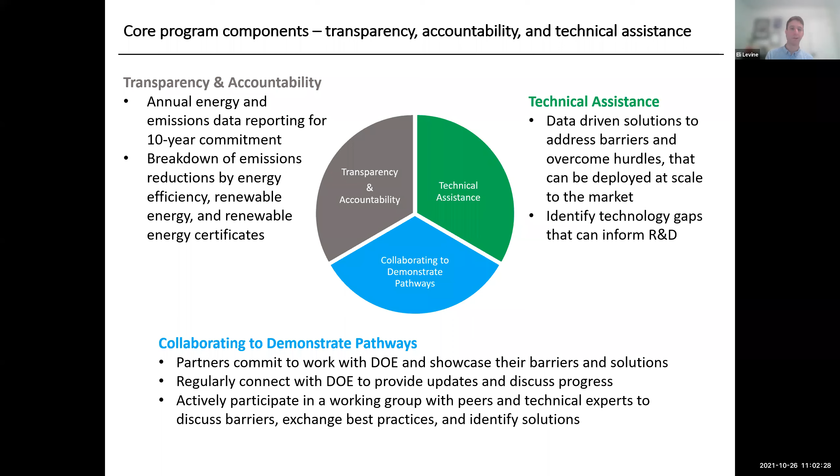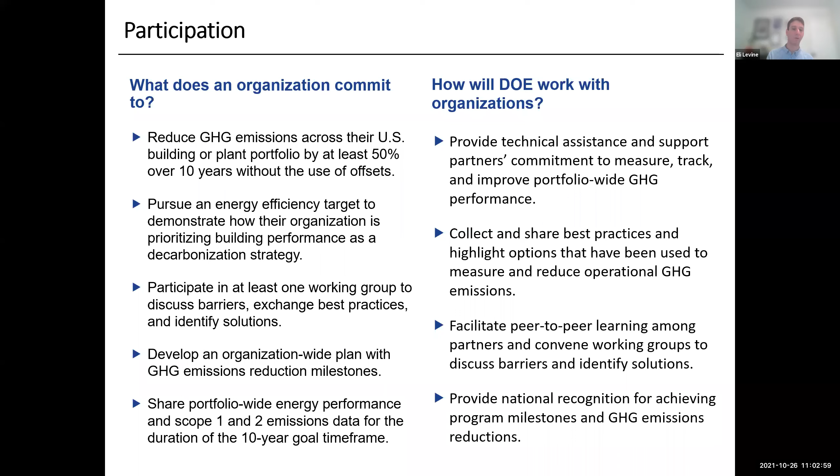So what do we ask? We want you to commit to reducing your carbon emissions, to continue to pursue energy efficiency, to participate in our working groups so you can learn from each other and get the most out of the program, and to continue sharing your data with us. In return, we will provide robust technical assistance, tools, training, and resources, as well as facilitating peer-to-peer learning and providing national recognition.

So, next slide. If you're interested in any of this, and I really hope you will be, there are ample reasons to be. Not only is it good for your organization in the future, but there are all of these other resources as well. There's no cost to participate, and we hope that you'll do so. If you have any questions, please reach out to me, the Better Plants team, or the broader DOE team. Thank you for considering this. Happy to answer any questions you might have, later, offline, or whenever.

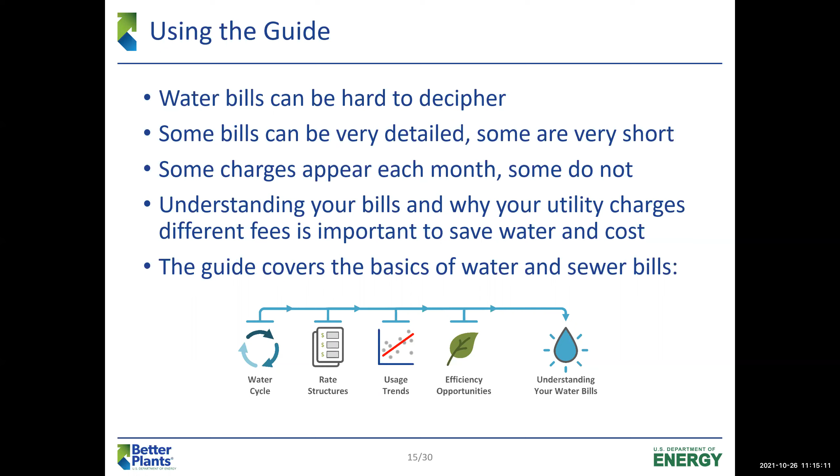I want to clarify that this document we've put together for our webinar today is for utility bill water, meaning water you receive a utility bill for from a municipality or a private water company. This does not include source water that a lot of manufacturers use. If you are self-sourcing, that is not covered under the scope of this document. Rather, we're talking about a physical bill that you receive from your municipality or a private company.

So to start, where is your water coming from? How is it produced? Water is a bit different than the other utilities we have looked at in this series. Natural gas and electricity are produced and distributed, then used, and at the end that's basically the end of the utility line. The energy is transferred into the product or moved somewhere else, and that's the end of that utility.

For water, it's more of a cyclical path. It'll keep repeating itself over and over. So once that water is used and discharged, it will rejoin the cycle and be treated and reused over and over again.

This is referred to as the urban water cycle. This is a bit different than what we learned about in elementary school. Rather, this is the urban water cycle, showing where your water is going in the system and what all the different stops are. You'll see that we start at the top of the cycle.

We start with your source water. That source water can be rivers, lakes, ponds - wherever that water is initially coming from. That water is pulled into a water treatment facility from those local sources like groundwater or rivers. Water treatment facilities physically and chemically treat that water to balance it and bring it to a potable level that you can consume, by removing those harmful substances and pathogens that may occur in the natural source water.

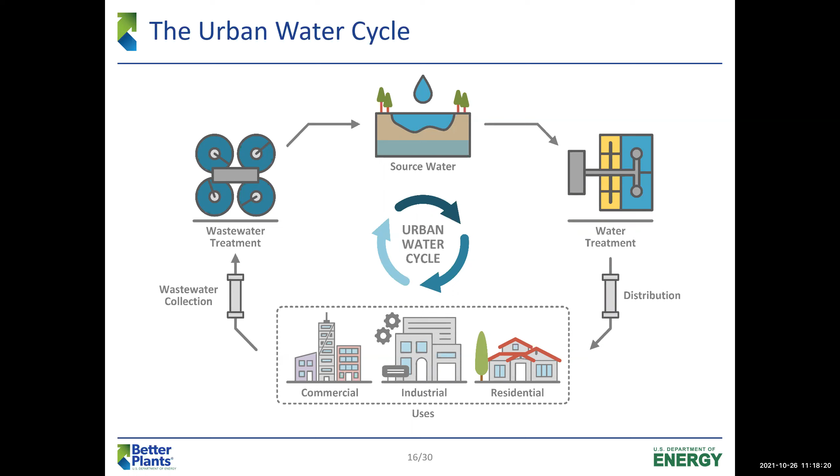So your cycle may be a bit different. You might get water, some may be sourced groundwater by yourself, and you only get a certain percentage of municipal water. Maybe you collect rainwater, or have a lake nearby that you're able to use or that you own. You might not have the same distribution system, and may have industrial water sources instead of regular municipal water sources. But overall, this is the same cyclical path that water will pass through over and over again.

So we talked about the source water a little bit. Let's talk about the treatment process. You'll see there are 4 main methods listed. We like to clump together coagulation and flocculation. That method is more commonly seen in water treatment rather than wastewater treatment, but it's still there.

The way that works is positively charged chemicals are added to the incoming water and debris, which neutralizes the negatively charged particles in the dirt, causing them to bind together, forming clumps called floc. You'll see in that flocculation image that dirt is being clumped together and building these flocs. Due to that increased weight, the floc will then settle to the bottom, forming sedimentation, which separates that floc and the water.

That layer of sedimentation then goes through a filtration system. So once that floc is settled, the remaining clear water is routed through a filtration system.

Several filtration systems are used in the industry, and they vary in composition and pore size. So the bigger the pore, the more that will reach through. The smaller the pore, the more it'll catch, right? Just a normal filtration that you think about.

Common filtration systems include activated carbon, maybe reverse osmosis membrane, or a mixed media. So maybe you have sand, gravel, and charcoal, or I've actually seen personally several combinations, right? I've seen membranes be used and then they'll go use the filtration, or vice versa. So you can have a variety of different filtration processes.

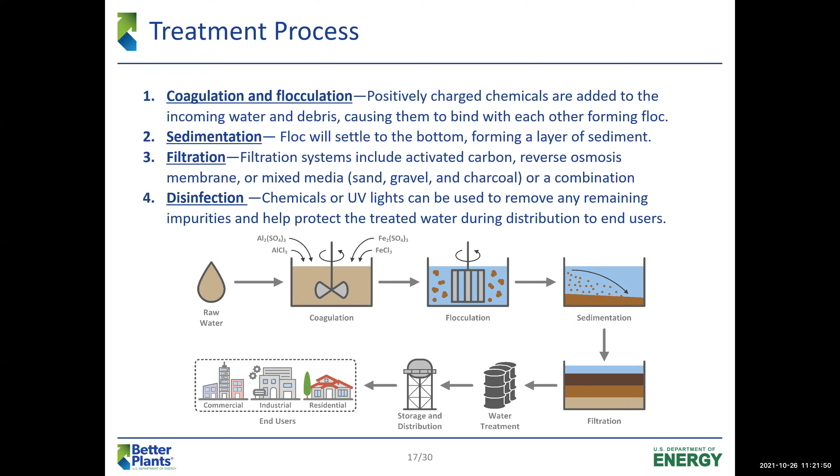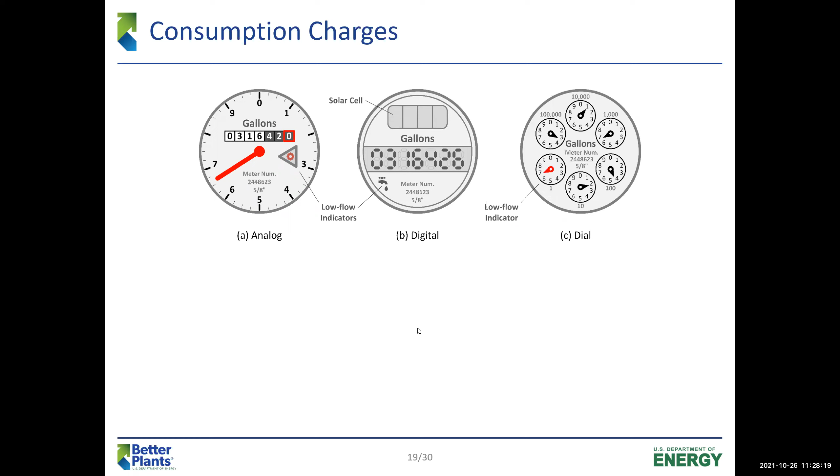Meters are the main way we actually get those consumption charges. Water consumption or usage is the total amount of water that your facility uses to make products or has there for that comfort water. So that is your incoming water that you're being charged for.

That is clean water from the water treatment facility through the distribution pipes. Usually in the US, it is measured in gallons or cubic feet. A lot of times you'll also see hundreds of cubic feet, which comes out as CCF. So that's another common unit to see here in the US.

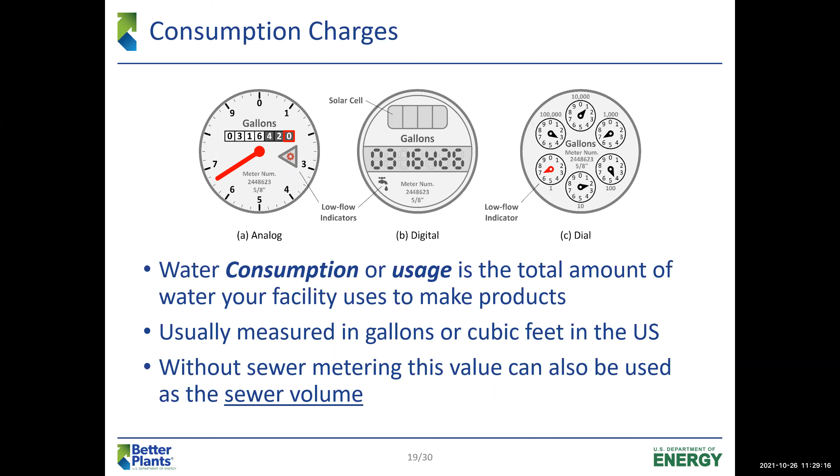The final thing we'd like to point out is that sometimes without a sewer meter, this value will also be used as your sewer volume. So even though this is technically the incoming water that is being read, if you don't have a sewer meter or evaporation credits or things subsequent to that, then you don't actually have a volume, so they assume that this will be the same volume.

So let's talk about sewer charges a little bit. This is the other portion of that urban water cycle. After it leaves the commercial, industrial, or residential users, it is collected through those sewer pipes and that system to gather that sewer, and then goes to the wastewater treatment facility. Your sewer charges are actually used to fund the wastewater treatment, and that's why they separate it.

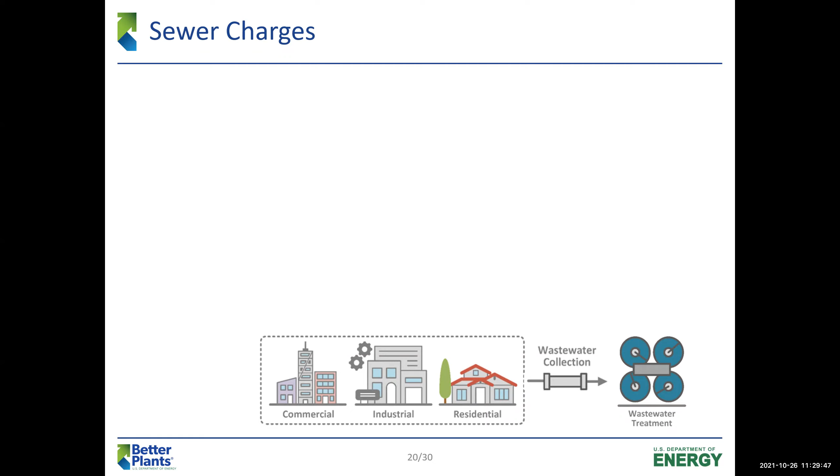So wastewater treatment is for your sewer charges. And like I said earlier, without a sewer meter, the sewer volume is assumed to equal the incoming volume. So in simple words, water in equals water out in a lot of utilities' minds.

Depending on your industry, this may be pretty close. Your losses may be negligible and it may not be worth putting in a sewer meter, in which case water in, water out works for you.

But in other industries, say beverage or food or chemical, right? You consume a lot of the water into your product. Your product is made of water. So water-based products are leaving your facility, in which case it might be worth looking into finding out about a sewer meter to help you avoid some of those sewer charges if you're not actually using the sewer. So that's the idea: if the water is not going into the sewer, you shouldn't have to pay for that wastewater treatment for the water that's not there. Just something to keep in mind depending on your industry and your sector.

So like I said, if the process consumes a lot of water, you can either install a sewer meter. The second option would be to apply for an evaporation credit. Evaporation credit doesn't always technically mean the water is evaporated, it just means that it's not going into the sewer. Some examples of that would be cooling towers, maybe you're losing water from your cooling towers and your bleed-off rates and such.

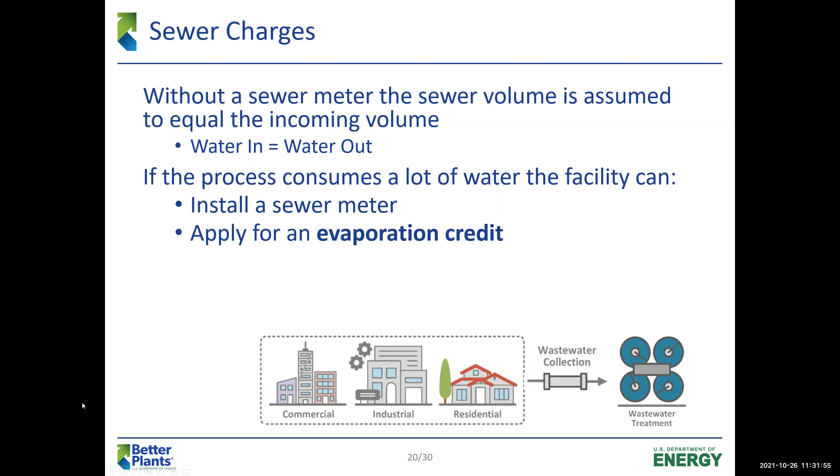The final thing to know about sewer charges is some facilities can treat their own water. I know several of my partners actually have to treat their own water and then they discharge it into the local sources. To do that, they have to treat the water to meet EPA standards. This way they're avoiding those sewer treatment charges or possibly surcharges, which again, we'll talk about later.

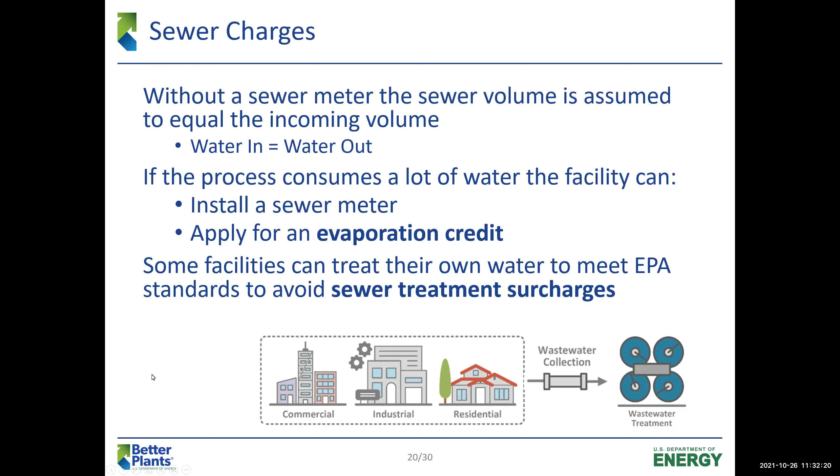So I do want to go over a quick example for the evaporation credits for a cooling tower in this case. To give you a little intro: a manufacturing plant uses chilled water for both process and comfort water. The chiller is water cooled and utilizes a cooling tower for heat removal. The plant will add makeup water to replace the evaporated water from the tower, and simultaneously it discharges the bleed off.

So to maintain the appropriate concentration of those dissolved solids, to help figure out if they can get evaporation credits, the plant monitors both the makeup water rate and the bleed off rate. So the difference between those two would be that evaporation volume. Because they have those two values and their utility is willing to work with them using those two values, they are actually able to apply for the credit.

So how much do you think they would get for that credit? The first thing we have to do is calculate that evaporated water volume. We find that by finding the difference between the makeup water and the bleed off water. The difference would be the water that was evaporated. In this case, you would have that 12,000 gallons a day minus that 4,500 gallons a day to give you a grand total of 7,500 gallons a day that is being evaporated from the facility.

So then, simple calculation, the evaporation credit savings is going to equal your evaporation rate times that sewer rate, because that's avoided sewer cost in this case. And that's the way that this particular utility set out their evaporation credit program. So we just take that 7,500 and multiply by an average of 30 days a month - you know, it could be 28 or 31, so we'll take the average of 30 - and then that 0.3 cents per gallon. That will give you a grand total of $8,100 a year of avoided sewer costs.

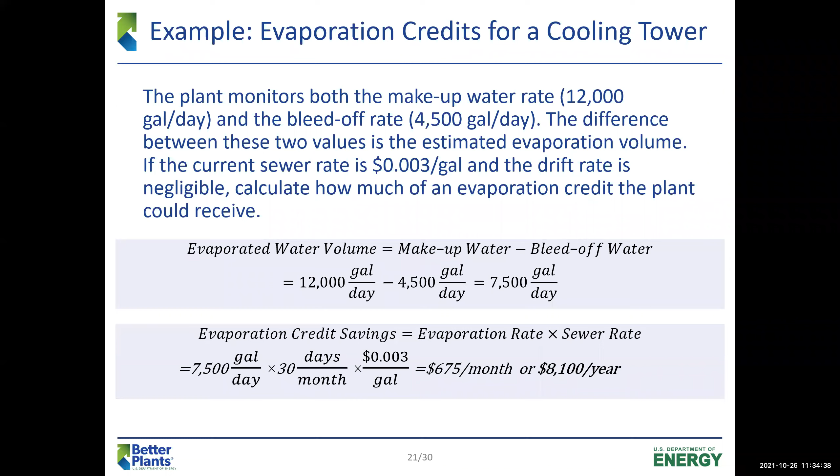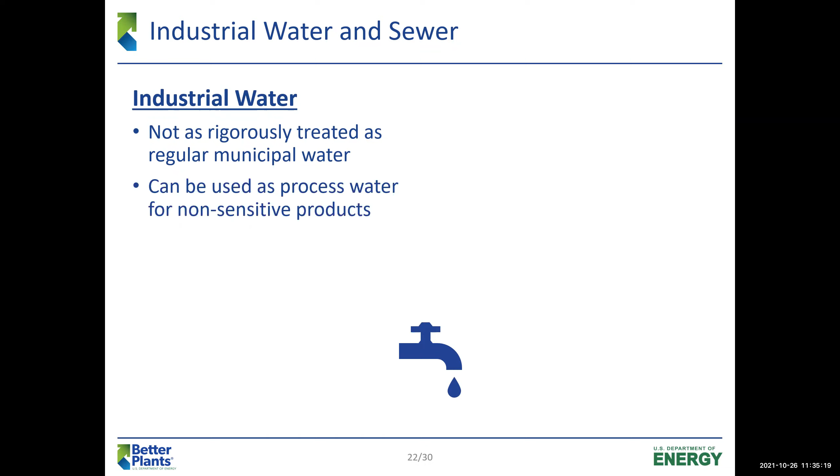So we're going to talk about industrial water and industrial sewer. Earlier on in the urban water cycle, I showed you that it was a municipality in that case that was treating the water, delivering the water, and then taking the raw water and treating it again. But in the industrial world, we do have something called industrial water. This industrial water is not as rigorously treated as regular municipal water. The idea with this water is you might have a process that doesn't need as clean as water, for a more non-sensitive product, so maybe it's using a quench water, right? You don't need super clean water for that.

And because it's less rigorously treated, it's going to cost less than that municipal water. So you can actually save money by using an industrial water source. Depending on where you're located, your utility may have that source for you, or you may have to find a third party for that.

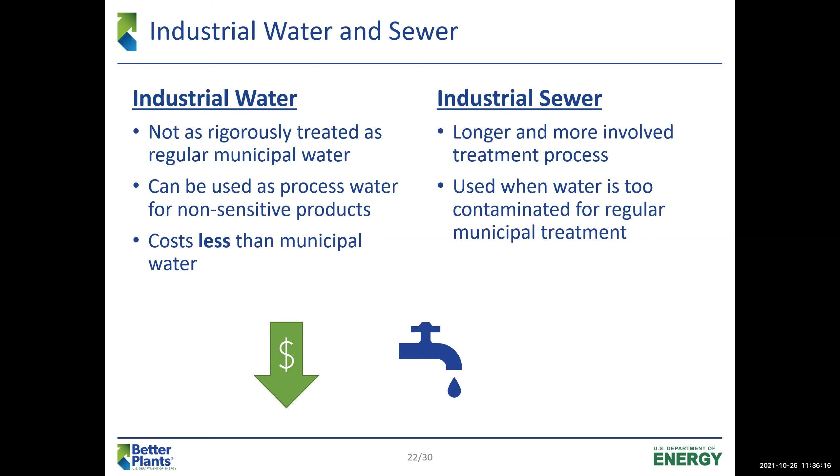The second part of it is industrial sewer, right? So this means that your water is industrially dirty, more dirty than your regular municipal treatment center can take care of. So this means it's a longer and more involved treatment process at that treatment center. This is used when water is too contaminated, right? They can't take out all the chemicals and all the added pathogens or pieces of your product. So they have to outsource that, or they have a separate facility for that. Because it is more rigorously treated, it will cost more than the municipal sewer. That's just something to keep in mind, and we will bring that back up in a few slides.

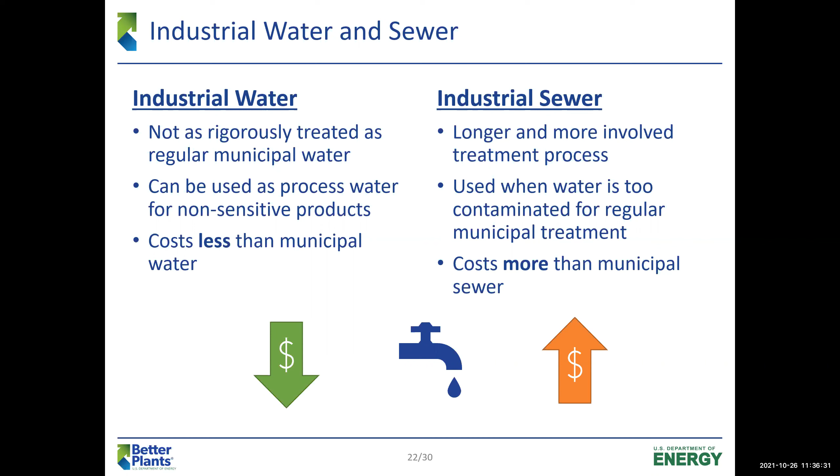So riders and fees. Several other charges can be listed on your bill, and in a lot of cases, they'll have nothing to do with your volume of water or volume of sewer. They're just additional fees that you have to pay to help upkeep the distribution system, or to help pay for all those additional pieces. These are also called riders or modifications to your rate structure. So it may be an additional line item on your utility bill. These items are usually extremely descriptive and are used for a very specific purpose.

So for example, a storm drain fee. That fee is actually calculated based on the amount of porous ground that you have around your facility. The more you build, the less porous ground you have to retake the water, so the water cannot go back into the ground because you're building something on it. So to help offset that, the extra water has to go to the storm drains. That storm drain fee is actually used to help upkeep the storm drain lines.

A fire line fee would be a fee that you have to pay if you have separate water lines for a fire. So for a lot of facilities, this is just in case water, right?

So you shouldn't ever have a volume listed on your fire line fees unless your fire line goes off. That might be an indication of a leak, or your fire line may have been used in case of an emergency. That fee is there to say that at all times you will be provided this amount of water, ready for you to use at a drop of a hat, which is a good thing.

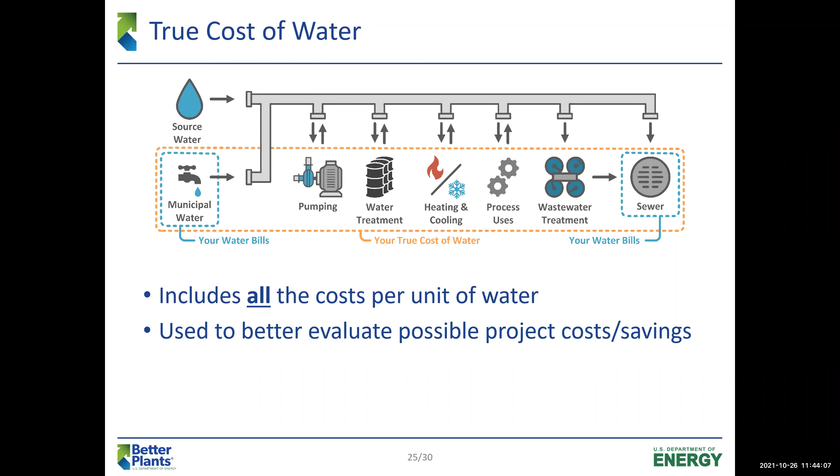Sometimes this can be double or triple the cost of your water that's on your bill. A lot of manufacturers use this value to better evaluate possible projects and cost savings. You're not just saving your utility bill, you're also saving energy, because you're not pumping, not heating, not cooling. It gives you a better macro understanding of that cost of water.

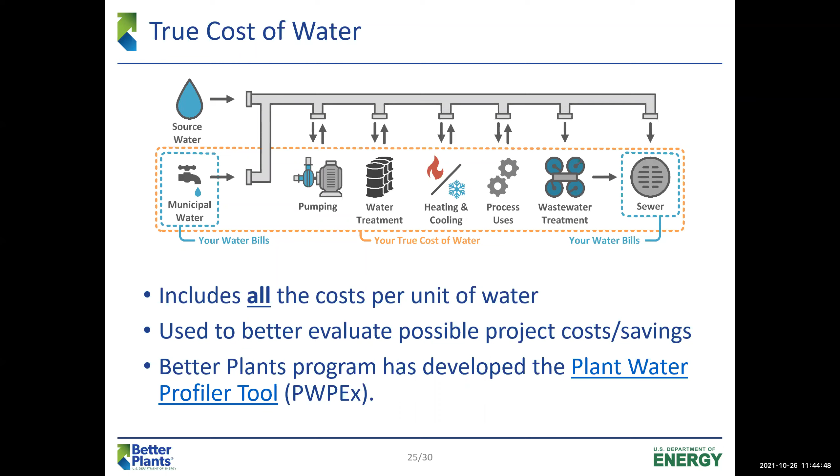I do want to point out that the Better Plants program has developed the Plant Water Profiler Tool. I've linked it here on the slides, but if you just Google PWPEx, you'll find it, probably one of the first ones to pop up. This is an Excel add-in, so it's very easy to use and download. It'll ask you all this information about your water and where it goes, what happens with it, do you have chillers, are you using steam. It'll help you calculate that true cost of water while also helping you balance your water. Water balance for your facilities is also a very important part of this tool.

Now let's move on to rate structures. We talked about your sewer and water, and there is a charge, but what are those charges? There are several common pricing options you see in water. One would be a uniform rate, where no matter your consumption, high or low, you're going to have the exact same unit cost the whole time.

The next would be block rates. The first is a decreasing block rate. With decreasing block rates, the unit cost of water decreases as more water is used. After that consumption tier is full, usage moves to the next block at a cheaper rate. So the more you use, the more those tiers fill up, and the cheaper it gets per unit as you keep going. This rate is most often found in rural areas for agriculture use and heavy industry in regions where water is plentiful, and they want to encourage that manufacturing and agriculture.

The second is the increasing block rate. This rate system encourages conservation by increasing the cost as more water is consumed. Increasing block rates are commonly found in more urban areas where the water supply is not quite plentiful, and it's used to help restrict water usage and encourage conservation.

The next set is time of use pricing, and there are two main ones we'd like to talk about. The first is drought rates. The two most common uses are drought rates and seasonal rates. The drought rate is found in regions where droughts are experienced intermittently, so it's common for droughts to occur, and they build it into their tariffs. When rainfall is limited, the water in the cycle is lessened, and it requires those regions to conserve water. During drought seasons, rates are adjusted upward to discourage usage.